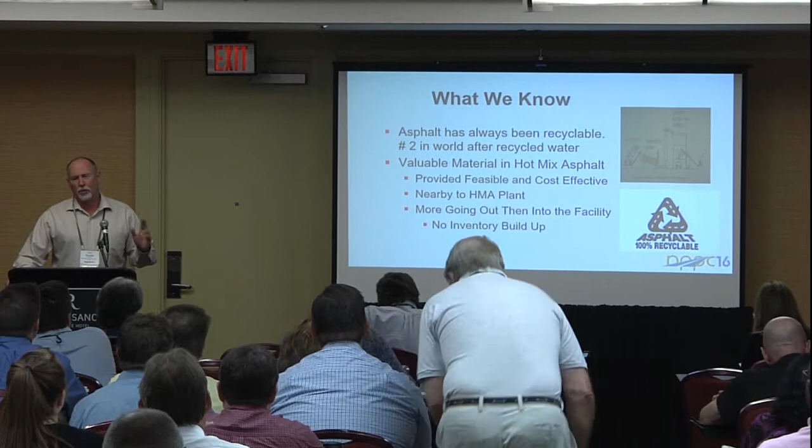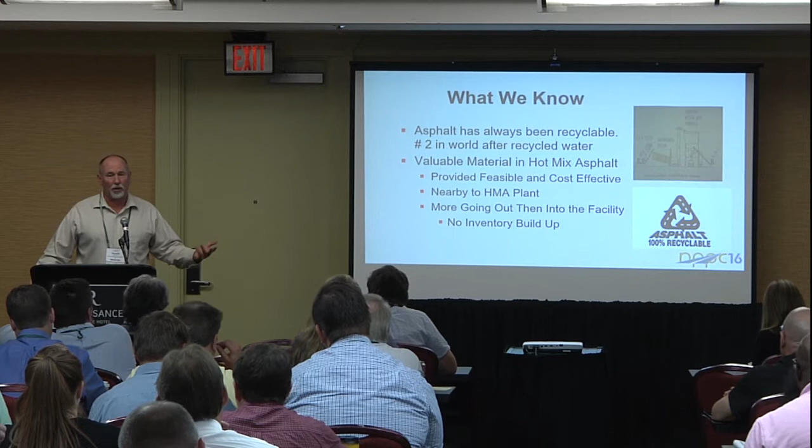So what do we know? Well, asphalt has always been recycled. In fact, it's the #2 recycled material, just right behind recycled water in the world. Everybody should know it's a very valuable commodity to use right back into hot mix. The only issue is that's generally based upon how close it is to the hot plant, and whether they're selling more than they're bringing in, so they don't have large stockpiles and inventory buildup.

We also use RAP in a lot of ways. We use it as shoulder backing, milling it off, putting it on the sides of the road, selling it over to trucking and equipment yards, haul roads, dust control on a dirt road. We're starting to use it now as a base layer. Caltrans in California gives it actually a higher value than aggregate base because of the binding characteristics. All these are great uses, but the problem is they're actually a low value for the value of the asphalt and the aggregates in there.

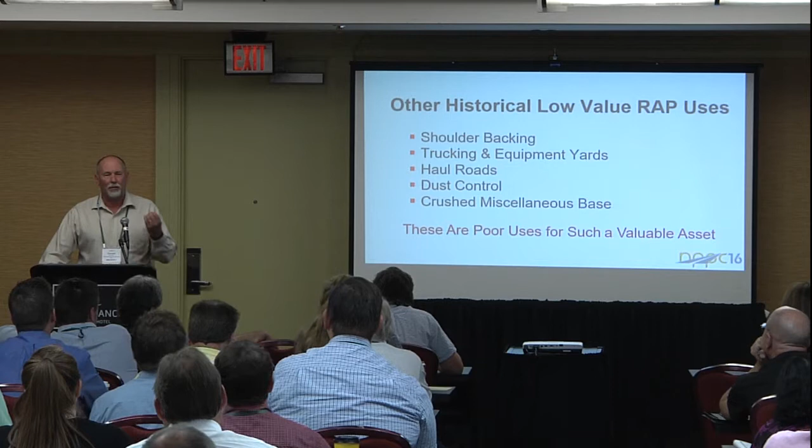So there's no need to squander virgin aggregate. How many people are having permitting issues getting new aggregate facilities in their states? We have a few of them. In California, it's almost impossible now. You just can't do it.

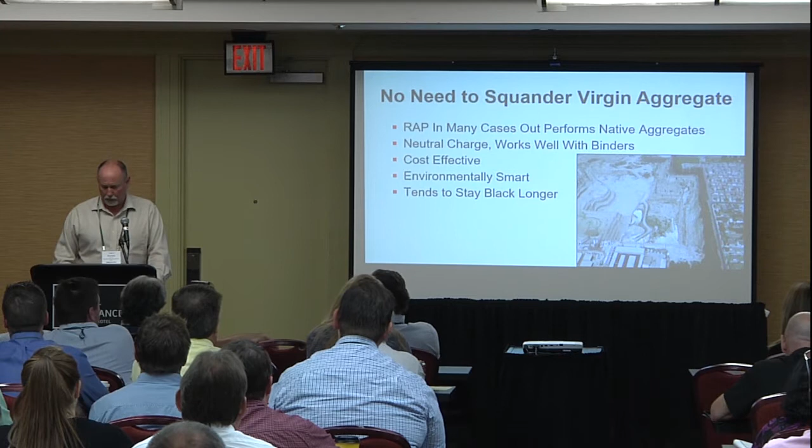So years ago, we started looking at using RAP as other aggregate uses, and we find out that it works well. It's normally a high quality material. It's got a neutral charge, so it works well with a lot of binders. It doesn't have the sensitivity in some of the pavement preservation applications. It's very cost effective, and then it's environmentally smart. You start looking at the carbon footprint and you start realizing there's a big advantage to it. And a side benefit we never tout: in a lot of applications, it just stays black a little bit longer. I'm not going to say it's a black rock, because it's not, but it stays black a little bit longer.

So today what I'd like to talk about is 4 uses that we use kind of routinely in California, and it's starting to spread out. In fact, FHWA put out a request for an evaluation on RAP chip seal and RAP slurries just recently. It was just recently announced who was going to evaluate all that.

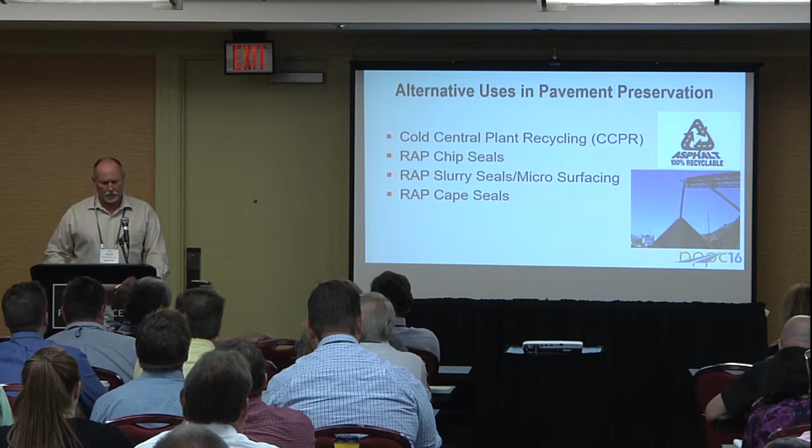So we're going to look at cold central plant recycling. We're going to look at RAP chip seals, RAP slurry seals, microsurfacing, and then a combination of RAP cape seals.

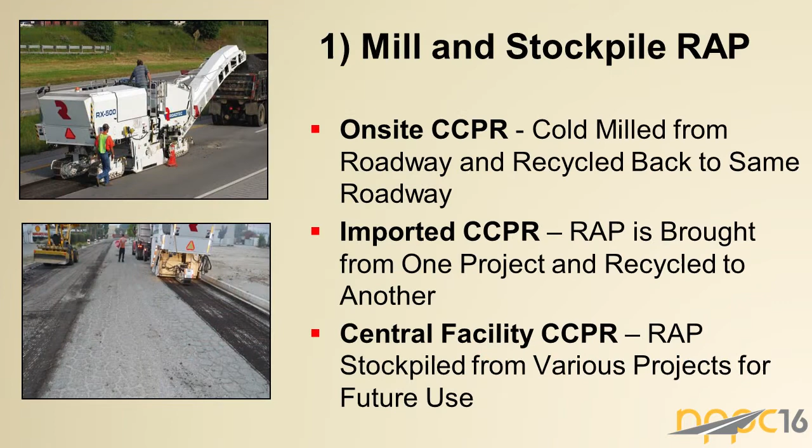So in cold central plant recycling, essentially we take the RAP and we make it into a new pavement. And you can do it one of 3 ways: on site, imported, or central facility. I'm going to go through those.

So on site, an agency may have a project where they have a distressed roadway. We'll cold mill it. You can see that we're exposing some of the subgrade. The nice part of this application is you go and fix any subgrade issues on it. And then we'll stockpile really close nearby, process it, and bring it back to the roadway.

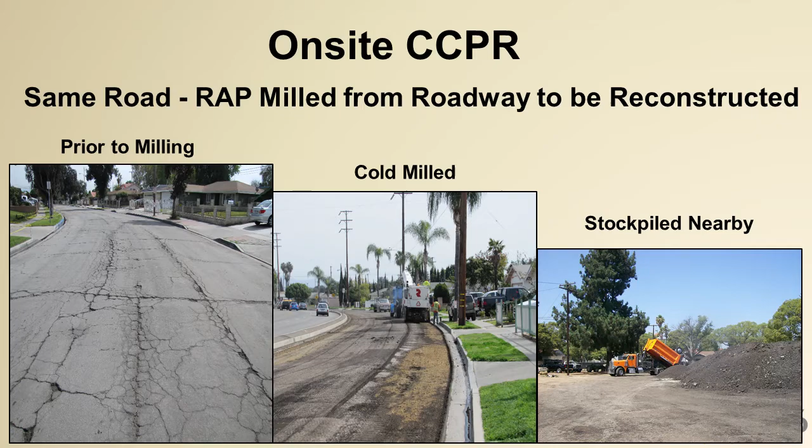In imported, you may have one site that needs the pavement, but the other site needs to get rid of the RAP. So we'll end up taking the RAP from one highway or one roadway and then going to another site and use it on site at their facility.

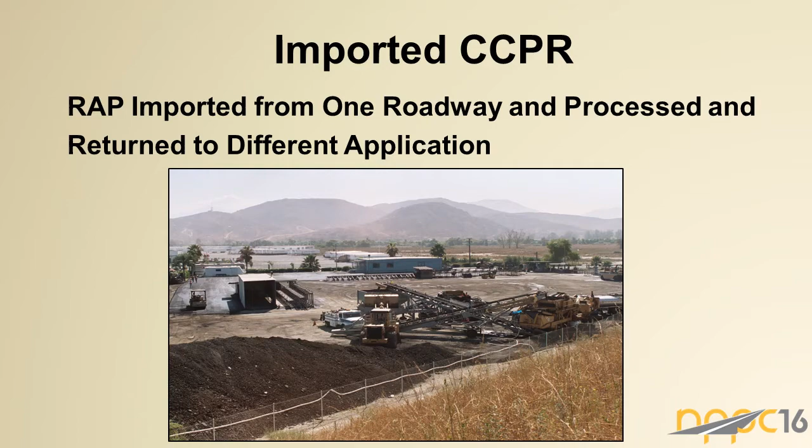The third is what we've started developing: we've developed central plant facilities. So we take in RAP from all our milling projects throughout the state, and we start using it for other applications as aggregates and in cold central plant recycling.

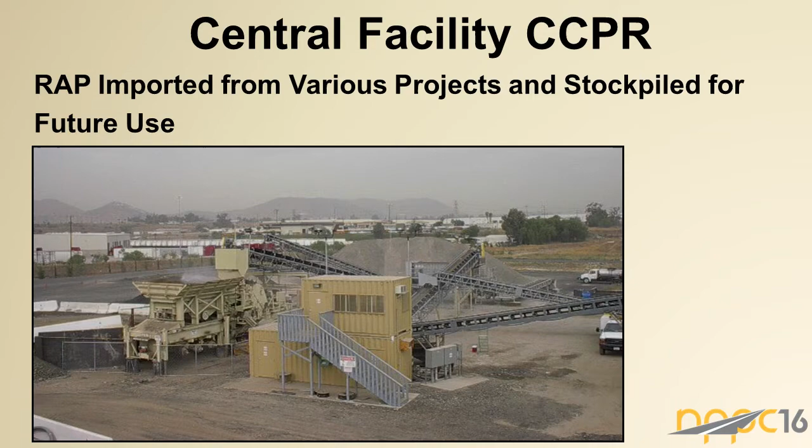So essentially, to go through the process, typically the RAP needs to be sized. We typically like to go a smaller size, more specific surface area. So we go down to 1 inch minus. I know in other areas, like Virginia, they may go up as much as 1¼ to 1½ inch.

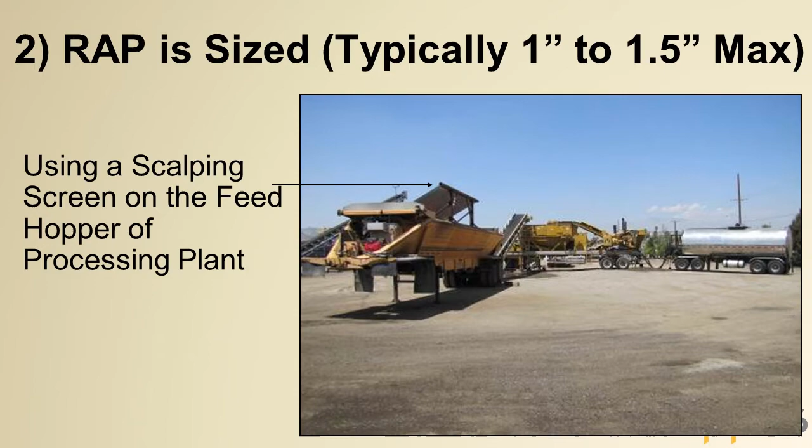You can do this on site just by putting a screen. Run off the millings, scalp off the big stuff, just use the littler stuff. Sometimes you try to break it up a little bit more, or not.

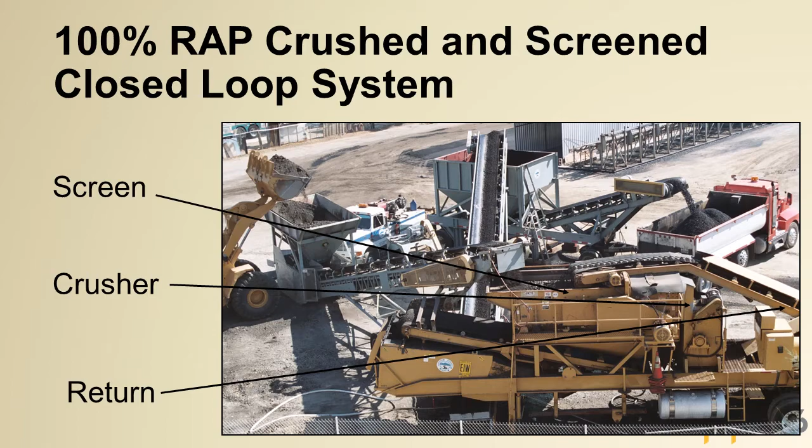Another way is using a closed-loop crushing and screening system. So you can just crush the material, put it over whatever the 1-inch screen, have everything crushed down to its 1 inch minus.

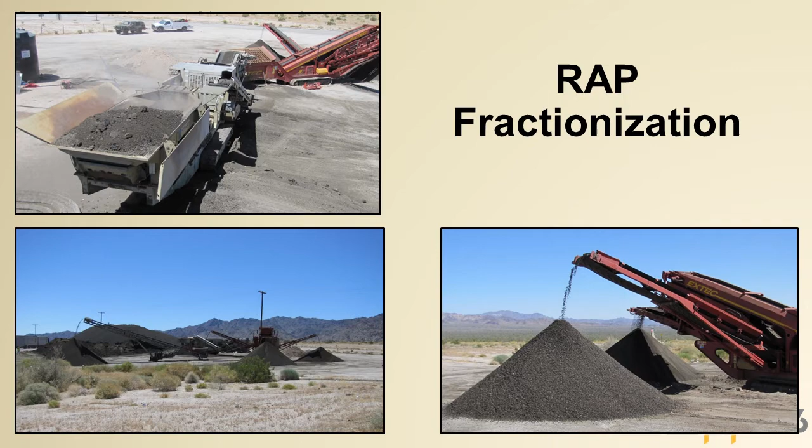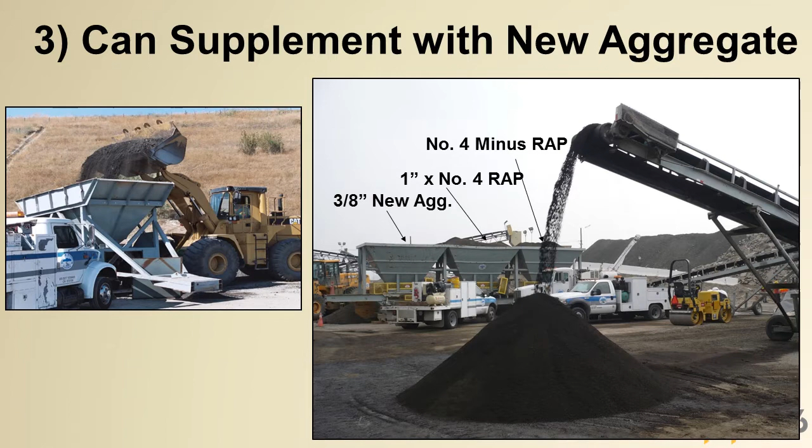Another area is to go further and screen it, segregate it, RAP fractionation, so you're able to combine it to an even more specific gradation. The nice thing is when you do RAP fractionation, like we do at our cold central plant, we can add new aggregate if we want to, so we can change the structure a little bit.

In this particular case, we got a 1 inch by number 4 aggregate, and then a number 4 minus RAP, and then we add 3/8 inch virgin material if we want for a specific performance measure. After you got the RAP size, you're going to mix it. People always ask me, do we use emulsion? Do we use foam? We use both. There's a lot of testing coming out that shows there's advantages and disadvantages to both.

In the long run, they both make an excellent product. We use engineered emulsions, polymer modified. Sometimes, depending on the agency, we may use a CMS2S, or we use an expanded foam. We almost always use some little additive. We like to use a bit of cement, not for structural characteristics, but for curing characteristics, the timing to change the breaking characteristics, giving us more short-term behavior.

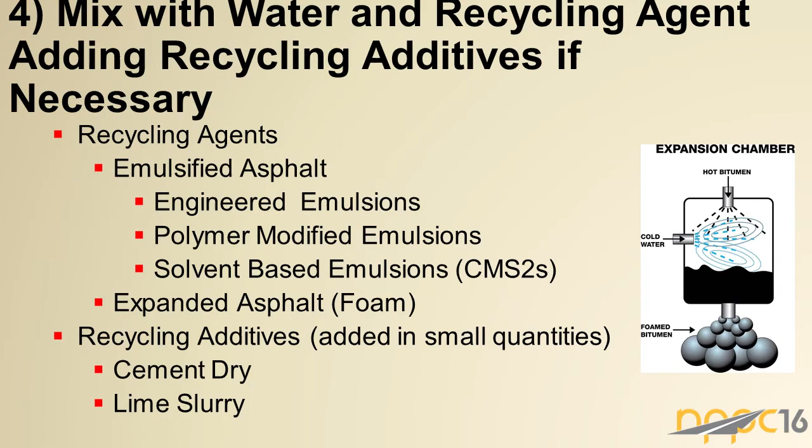In the end, though, we want a flexible material. We want that asphalt to do the workload. Sometimes, in some agencies, they require a lime slurry.

We can do it on site with a combination plant where it has crushing, screening, and a pug mill all in one application. You just set up some belts, some feed hoppers, and process it that way.

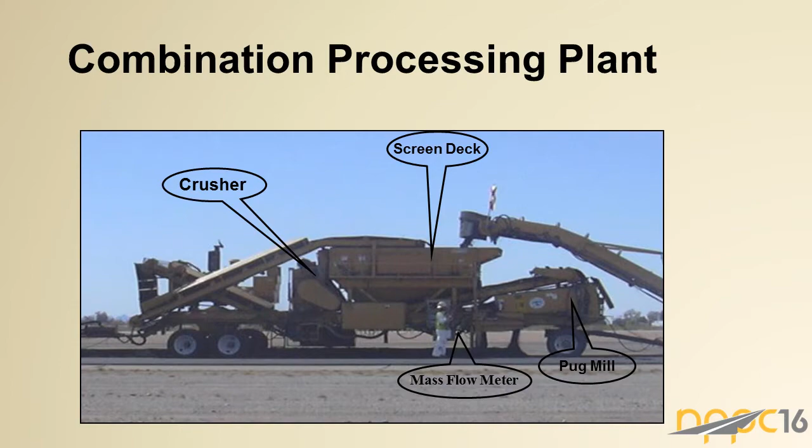Sometimes, though, we have both plants. You can just use the standard pug mill. We went into a large airport recently, and it wasn't really advantageous to make it while we were doing it, so we stripped it all off. They refixed the grade, then we crushed it down, and we just used a pug mill while making it right there for the application.

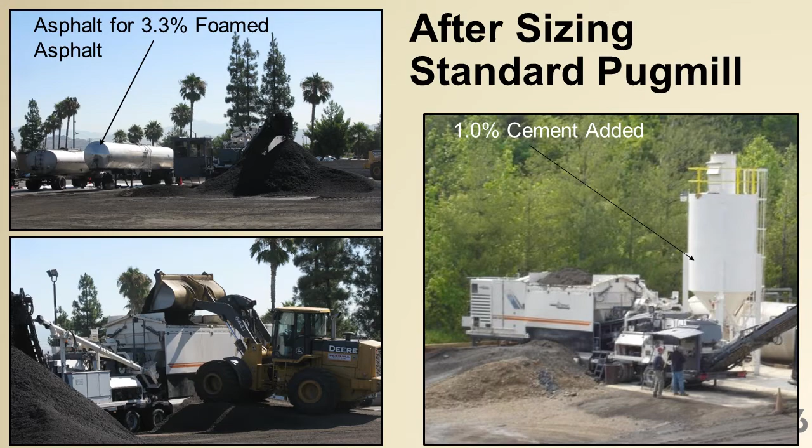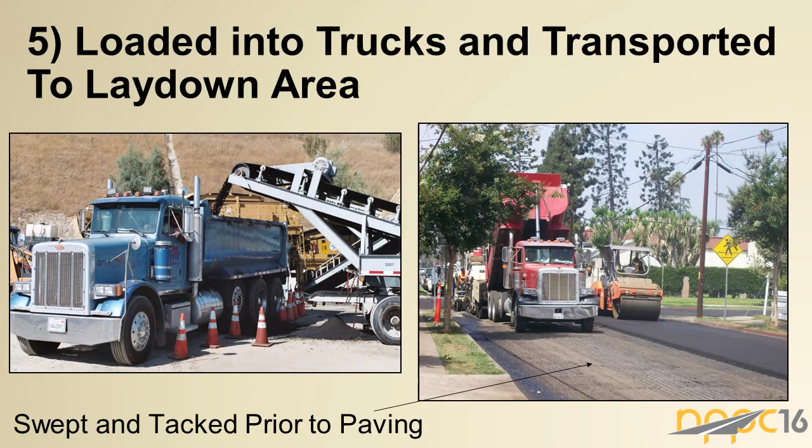We then pave it. As you can see on the right, this was actually a very heavy urban application. We do this process with virtually no limitation in traffic. A standard California road just down is 30 to 40,000 vehicles per day - we do it all the time. Heavy highways, 60,000 vehicles per day.

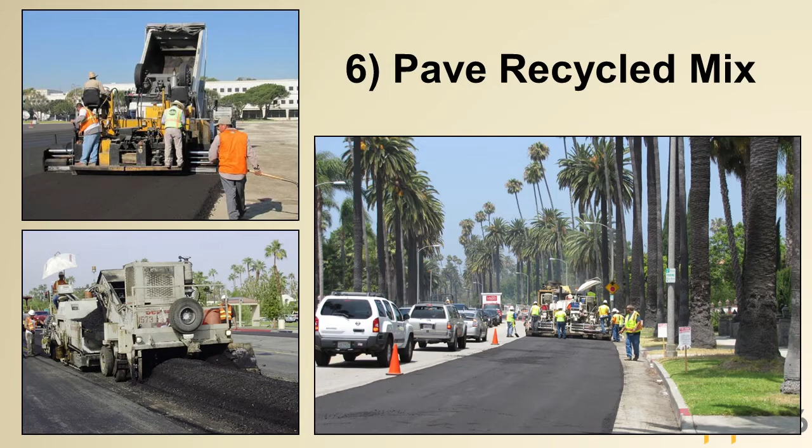The key, though, is because of the higher air voids, you have to have really heavy rollers to compact it. So we use a 25-ton pneumatic, really heavy 10-ton steel, and we actually compact it to a breakover density.

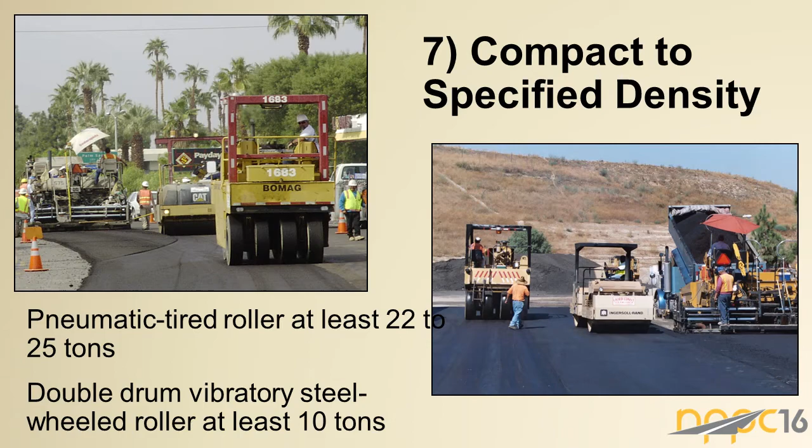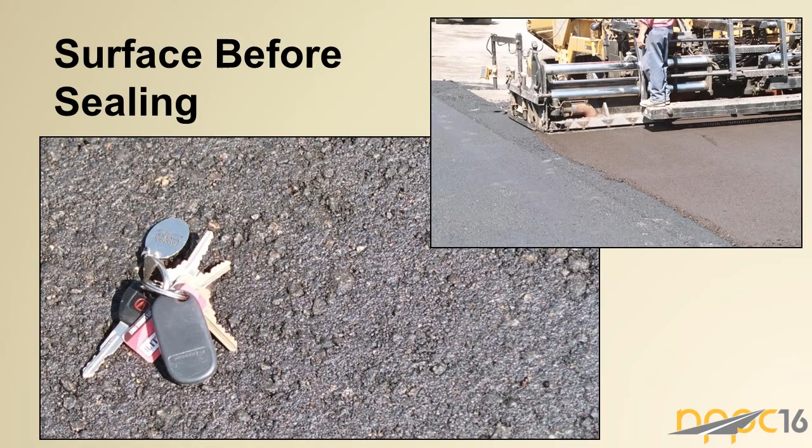We don't lay anything down without protecting it before we release it to traffic. We put down a fog seal - it gives it a bit of a tighter surface - and then we sand it just to make sure nobody's tracking that fog seal into their car dealership or wherever. And then we release it to traffic.

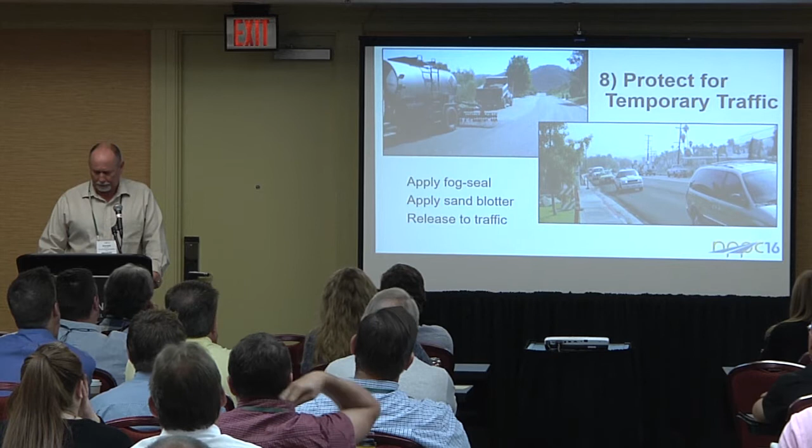We let traffic go on it. It can be several days, it can be several months if the asphalt plant lost their permit or something like that. At some point, though, with emulsion, we re-roll it. We can get about a 4% increase in density by letting the water dry out, re-rolling it, and doing a new breakover curve.

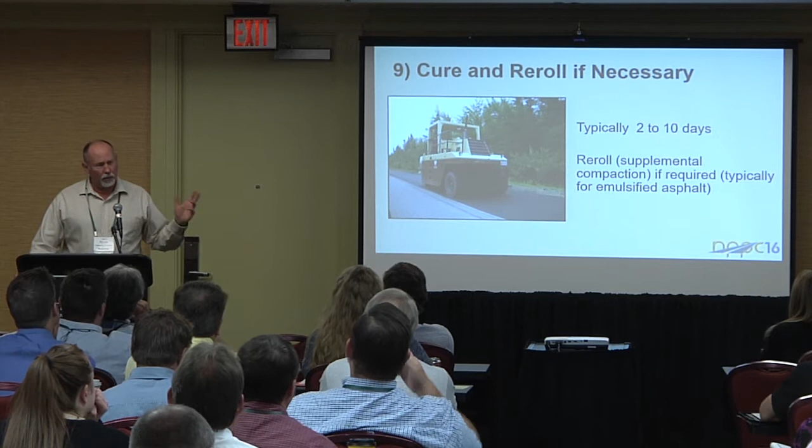Typically we don't do that with foam because it doesn't need it, but I still will re-roll it, just not to a specific breakover. Cold recycle, though, has higher air voids. There's a lot of testing being done showing that as it fully cures, it starts approaching the behavior of hot mix.

But that takes years, 1 to 6 years, depending on who you're talking to. The one thing we do know is it doesn't have the same shear strength that hot mix has, so it can't be left open to traffic. We always have to put something on it.

In lower volume traffic areas, we just put a slurry seal, microsurfacing, maybe a chip seal. As volume goes up a little higher, we'll put a thin overlay. Most agencies like to place as thin an overlay as they can, it's not about giving the structure, they just want it for the shear resistance.

Just a real quick case example, we did a job for the city of Menifee. The thing I like about this is Andrea talked about LA County. LA County does this a lot, this particular application.

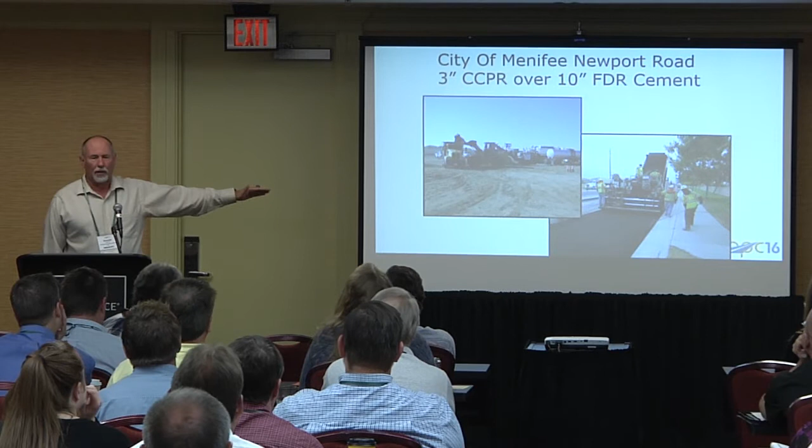We'll go in, strip off the AC, and then cement treat the subgrade. They go in and fix the subgrade, then use this cold recycled material maybe as the first 3 inches of the AC, and then come back with as thin an overlay as they can on top of it.

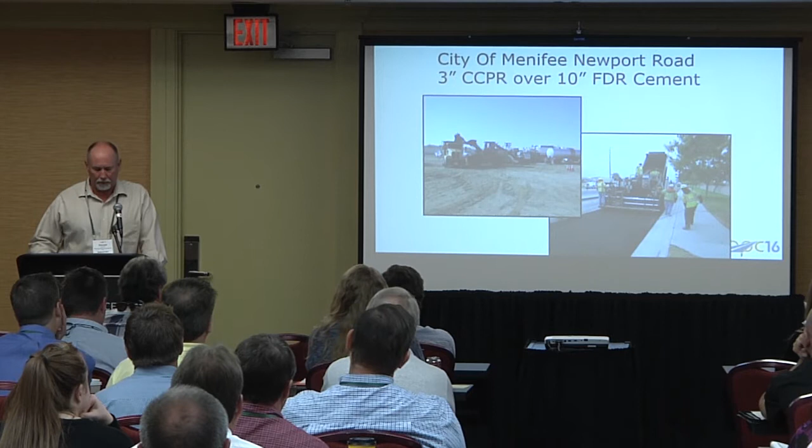Another application, we just did an existing auto auction, actually closer to about 5 million square feet. This was just the first phase, but again we stripped off the AC in one phase, paved it back, and kept moving over. I'd like to switch gears now and start talking about RAP being used as aggregates.

We used it in chip, and back in about 2005 our company really focused on the microsurfacing and slurry application of using RAP. I was a little worried about using RAP chip because I was afraid it would start kneading the surface together, meaning it heats up and the traffic gets on it.

Well, what I'm finding now is that's the benefit every agency likes the best. So they actually go hand in hand.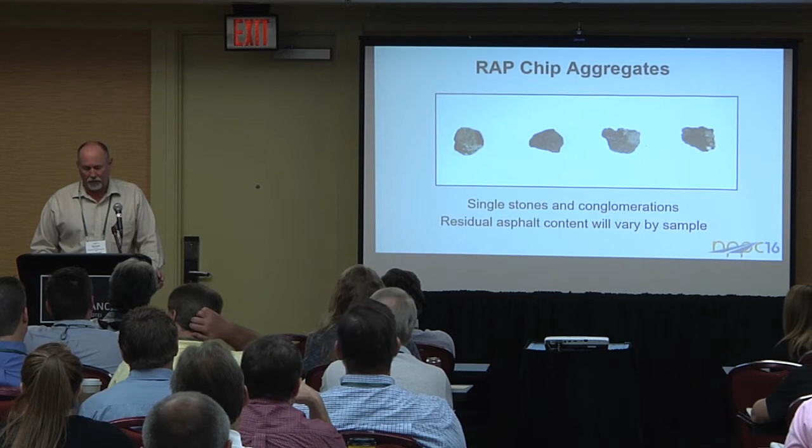What everybody wants with the chip seal is the benefit it provides the surface, and the RAP actually ends up providing a better surface. This is our standard gradation, we make two: a medium and a 3/8, we call it. That's the gradation of the RAP aggregate, not extracted aggregate.

The other thing is we want to make sure we always have a 3.5% minimum residual asphalt content on it, meaning we're not getting too much dirty material in there, or too much virgin material in there.

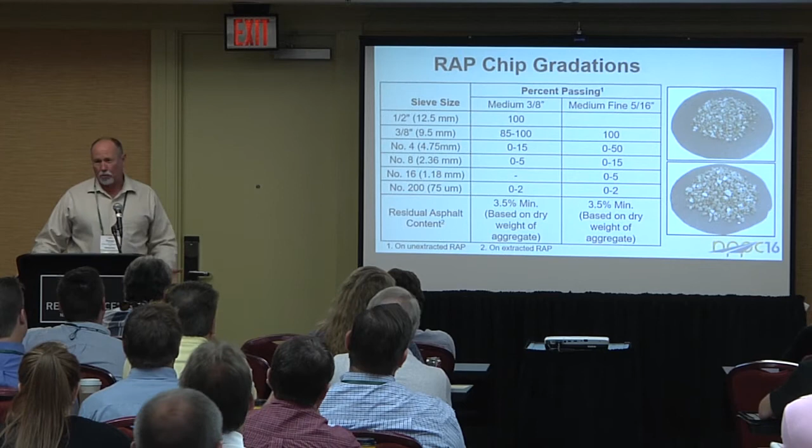Andrea talked specifically about the medium fines, that's used quite a lot in urban areas. The 3/8 is more in rural areas. One of the first things agencies need to get a handle on is we don't want to wash this product. With typical chip crushing you get smears and fines that don't bind very well, but when we crush this, we want the material to bind, and essentially the fines are asphalt.

In fact, for 3 years LA County has gone 100% to this, and a lot of agencies near us have gone 100% too. I couldn't get the county of San Bernardino, the largest county in the country, to use this because they had a cleanliness value. We could meet all the specifications, durability, everything, but we couldn't meet the cleanliness because we don't wash the chip. They wouldn't do it.

Ironically, they were the test project we first did years ago, but those people moved on, nobody remembered it. How many agencies have that issue?

Then this year, they couldn't get supply, so they were forced to say okay, we're going to take your material. They did one project, and since then they've gone 100% to it. In fact, we did almost 20,000 tons of chip for them so far just this year, just this year after they started trying it.

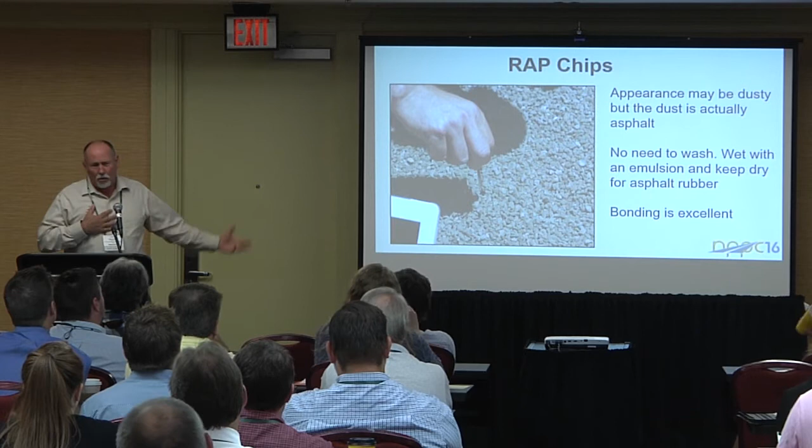I can say this without hesitation because this is not a unique process to us, we just started it, and California did it more. But any agency who switches over, when they switch or try it, doesn't go back. They just like the RAP chips so much better.

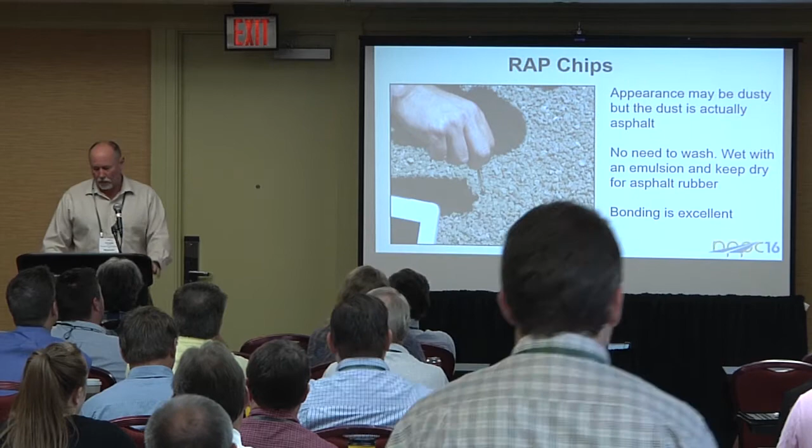LA County gave us a big challenge because they want to use it with rubber. So when we do emulsions, it's pretty nice, we can actually throw some water on it to keep the dust down. The wetter the better in emulsion applications. But on rubber applications, what happens when you have water hit hot asphalt?

It starts foaming, think about fried chicken going in the frying pan when it's still a little wet from thawing out. So we had to do a process where we dried the chip out a little bit and use this. So now they started using this instead of pre-coated asphalt chips. What they do is go to a hot plant and say, hey, we need about 1% asphalt or 0.5% asphalt on these chips so it would stick.

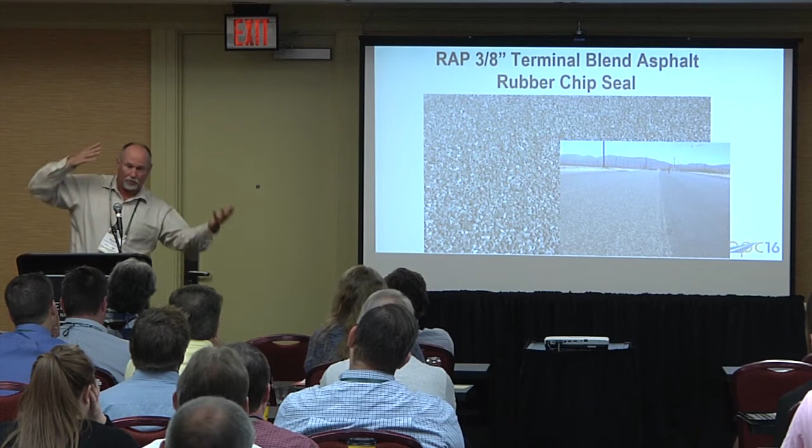As I told you, I did it back in 2006. Started the RAP slurry back in about 2005 - I'm going to talk to you about that now. But then we tried what we had left, and did this project in 2006 with a 5/16 chip with San Bernardino County. They had it installed.

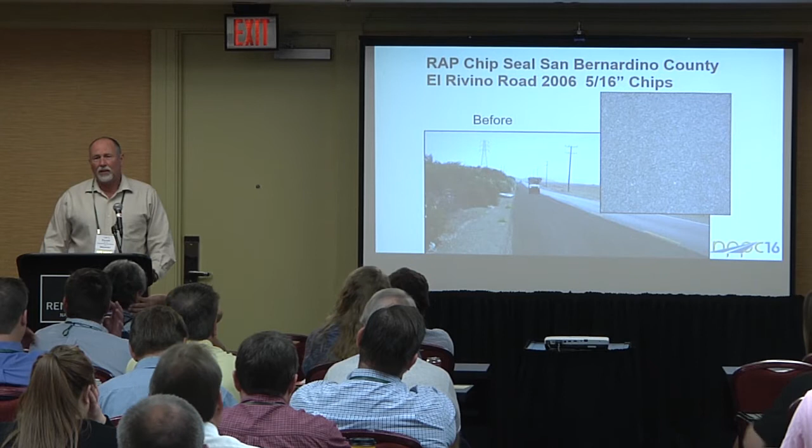It's right by our facility, I love going out there. Just recently I went out there, and it still looks really good - really, really good. It gives you a darker coloring. The traffic actually makes it look better.

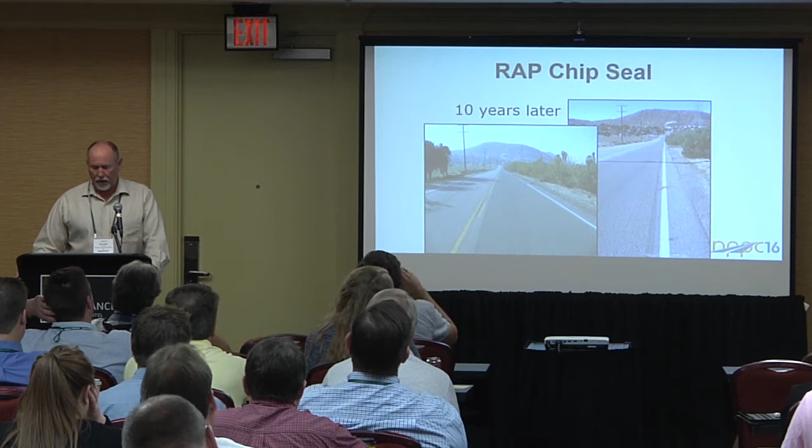So then LA County started wanting to use, let's do it on scrub seals. You can see what one of their first projects was back in 2009, off to the right picture. Now, is that a pavement preservation type roadway? No, okay. But...

How many agencies are here that have more than enough money to do everything they want? Well, really? I almost got a hand. I was going, oh, wait a minute. Everybody wants to take a picture with you.

Okay, so somebody asked, okay, why'd they go to the chip seal, scrub seal on Double Grove? Money. Hot mix asphalt, even a thin mill and fill, just costs so much more. So people are using - I don't want to use the term Band-Aids - but they're using alternative processes to try to get their money to go farther. So scrub seals are actually showing a lot of promise right now.

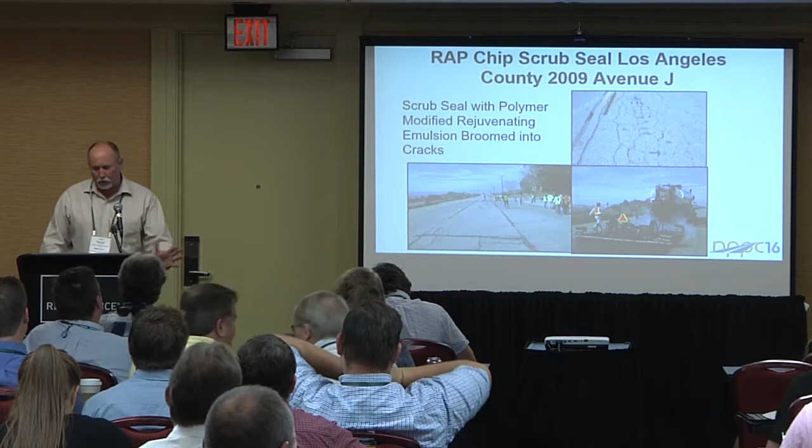It's where you take a chip seal, but you scrub the emulsion into it, crack sealing. NCAT has been doing some testing, if you're familiar with that, shows the benefit. This is actually - I wanted to get out there, didn't have time - but 6 years later, you can see that same area where the cracks are filled. Now, I'm not going to say you can't see them, but the water's not getting into them.

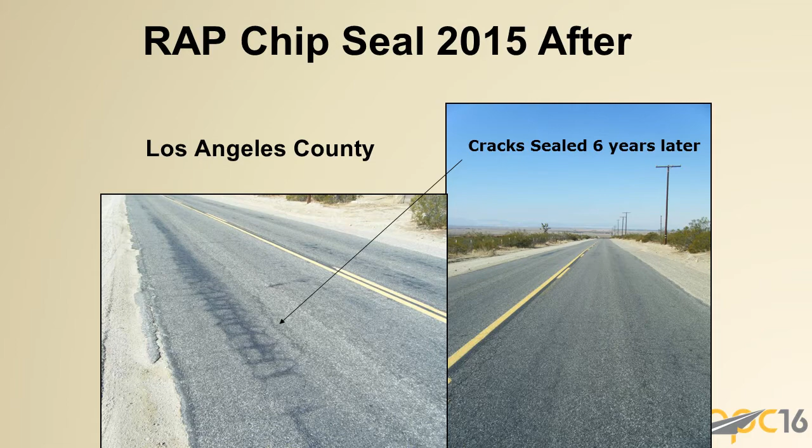It's holding up really well, and there's some areas of the project that look really, really good. So it's just an application that LA County has found is cost effective and giving them a lot more life.

We started with microsurfacing RAP and microsurfacing slurry with RAP. Way back in 2004, I started experimenting, and I got a company to say, hey, let's come out and try it. So they worked with us, and they liked it, but they weren't incentivized - they just didn't want to, since the agency's paying them for regular aggregate, there's really no sense of it. So we ended up buying the company.

And we put on their metrics - you got to start going more with RAP slurry. Well, they started getting agencies involved, and what they found is it took a little change. We had to do things a little bit differently - had to open up some things in our hoppers, and we have to roll it. But what they found is when they started doing it with the agencies, every agency only wanted that, and they were the only ones who had it. Guess what? Better economics for them. So it just started growing big. As I say, any agency who does it doesn't go back.

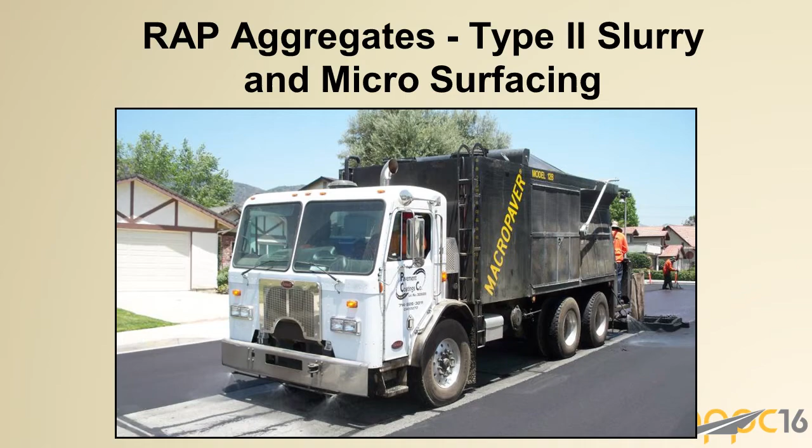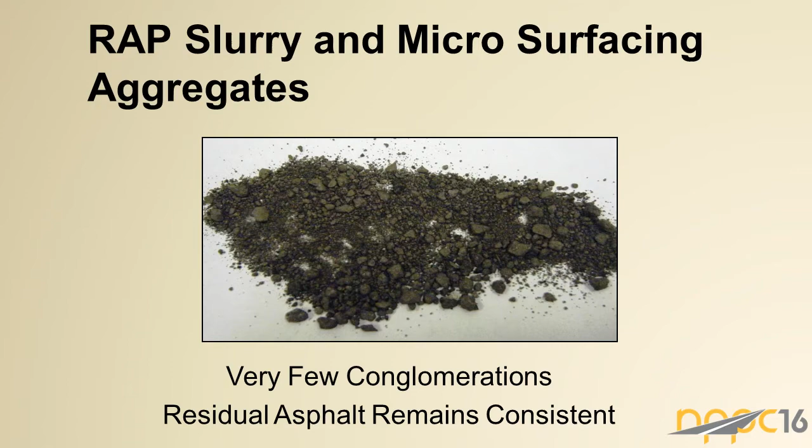So when we look at the RAP slurry and microsurfacing aggregates, there's not as many conglomerates, but it's finer, because it's a finer mix. But there are some.

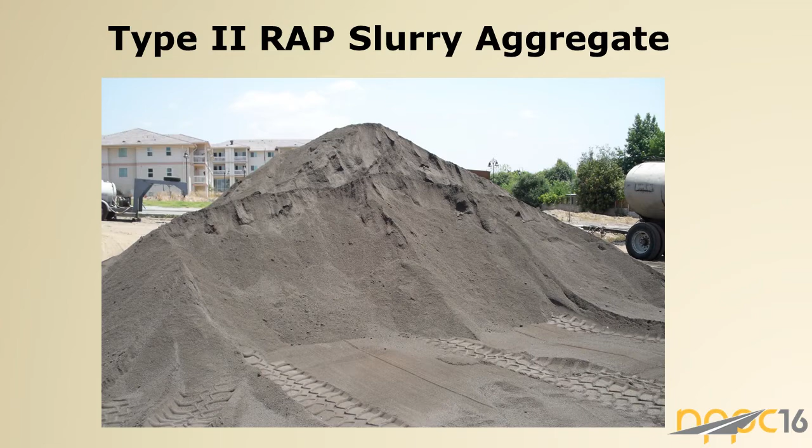You can see by far the biggest issue is stockpiling and handling. When you let this sit in a lot of heat, it starts clumping up. So we found techniques for dealing with that: we make it fresher, and we have some screens on the equipment.

The other difference between this and conventional aggregates is there's not as many fines, so we built our own gradation. Because you don't want to crush down all those fines and create more specific surface area, we don't need as many fines. In a regular slurry or microsurfacing, you need those fines for binding and to absorb a lot of the emulsion you're adding.

With RAP, we don't need that. We did find out about the clumping, so we have a standardized process we put in place. And what's interesting now is we have a company that makes the material, and a separate company that applies it.

Our company that makes it now sells it to our competitors, the companies who apply it, because the city agencies are specifying it's not proprietary. So we actually go out and train our competitors on the few minor things they need to do. Once they've started, our competitors have convinced agencies to switch over to it. They find it provides a better product in the long term.

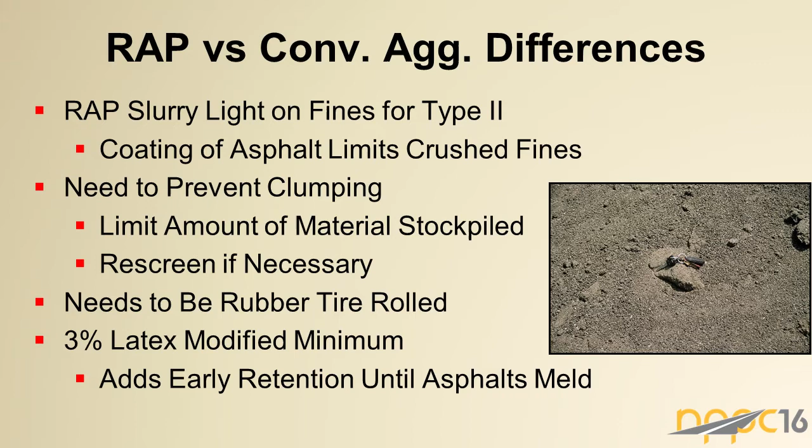You do have to roll it. We use a rubber tire roller to roll everything, and we use a 3% modified emulsion on everything. We find it adds a little bit better retention until everything starts softening up and comes together.

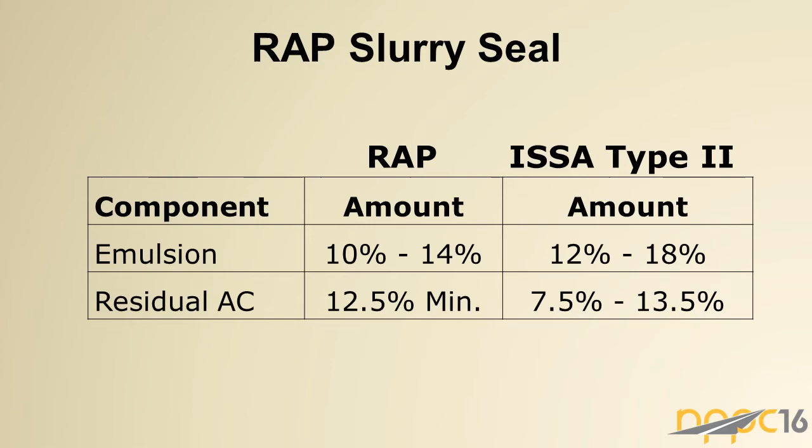To that end, we're allowed to use less emulsion, so it's actually just as cost effective, if not a little cheaper than conventional slurries, because that asphalt's already there, we use less. You can use conventional equipment.

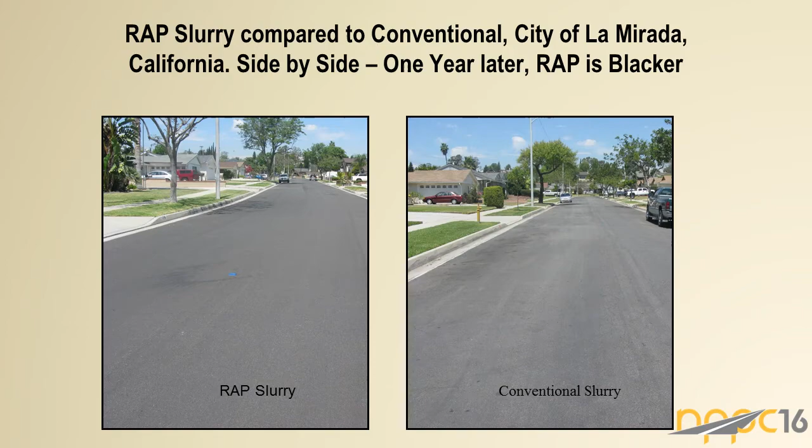I actually have the video on the Doublegrove, it's about 3 minutes. Do we have time to play it? It kind of ties everything we've been talking about together, if I can figure out how to play this. There we go.

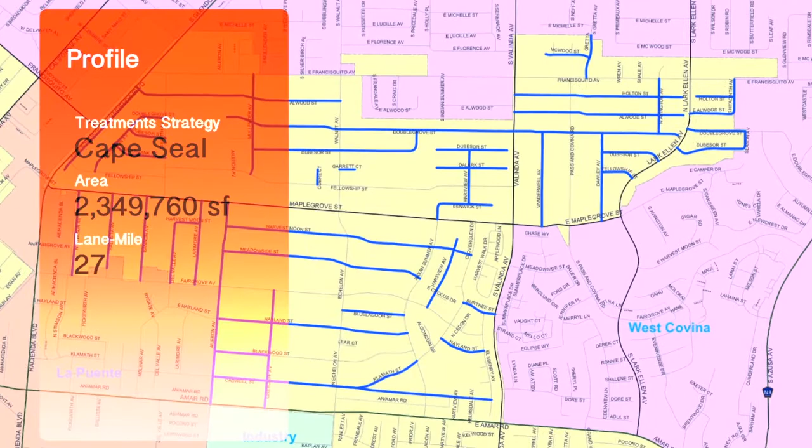The reason we're showing this is LA County was doing it for years, and they finally said they've got to start touting their own successes. So you can see all the streets that were done. It was only about 27 lane miles, but they had a lot of areas in really bad condition.

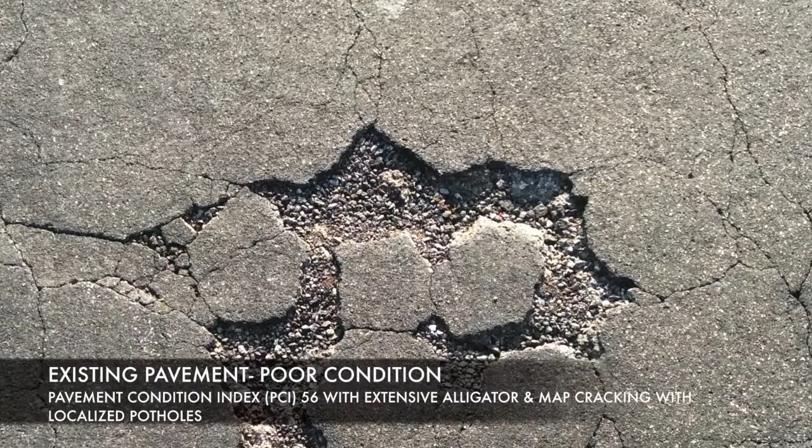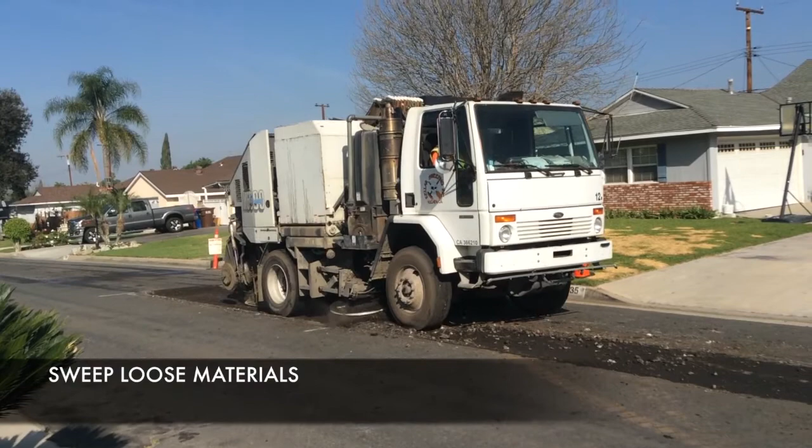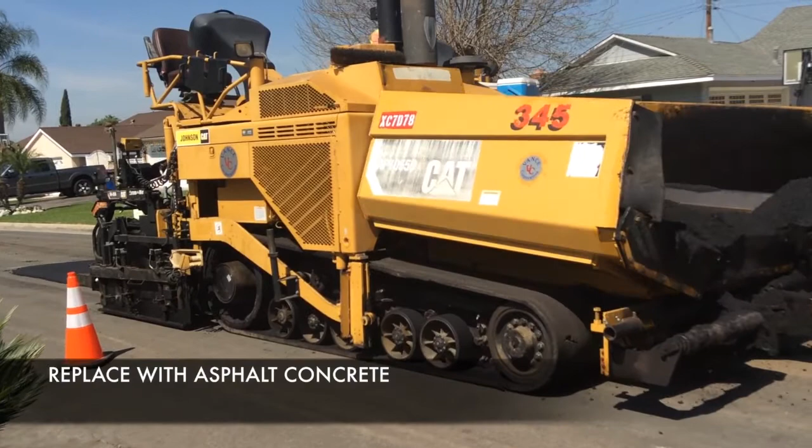So they did some limited dig-outs first, and some limited patching just in the really bad subgrade areas.

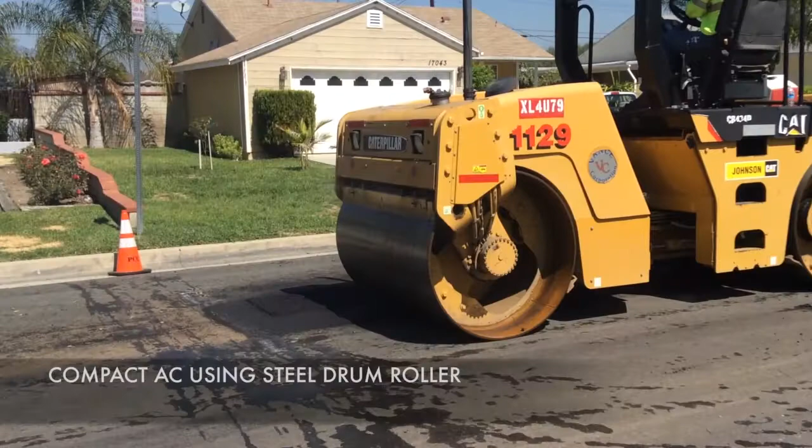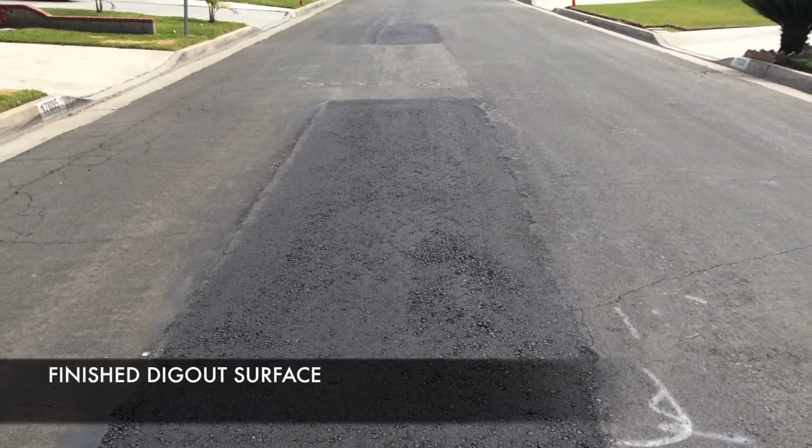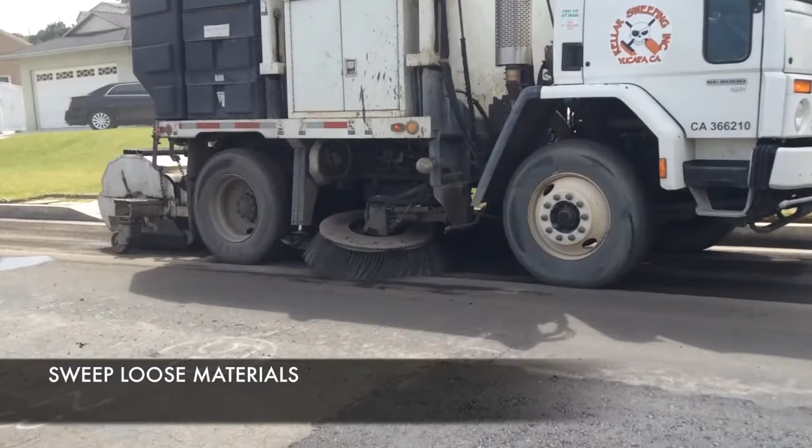So this is what we talked about most of the morning: we micromill. LA County's got to the point they won't do any pavement preservation without micromilling. They think they get better bonds. They clean off the gutters, so all those buildups of material are gone now, and I love when they go in because they promote it more than anybody.

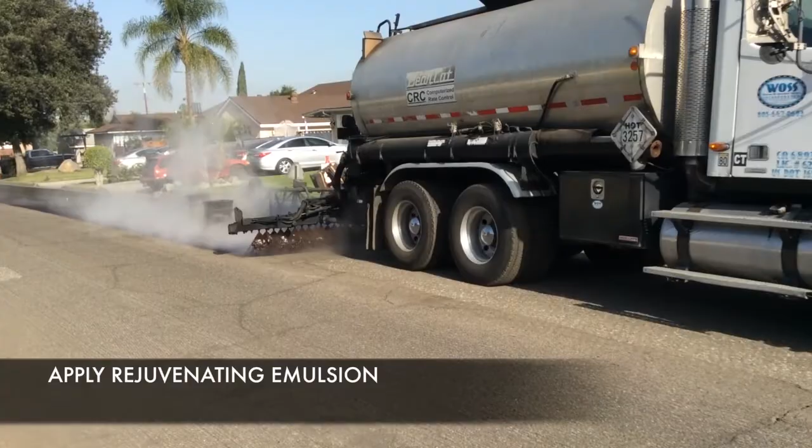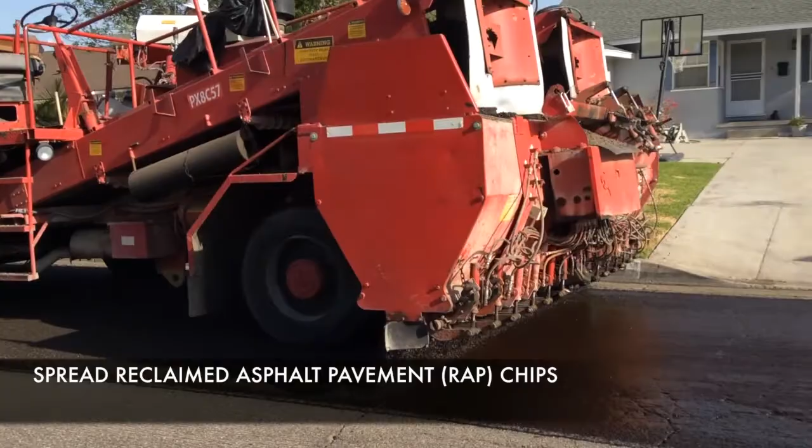So you can see the scrub application where we're applying the emulsion, and then we have a set of brooms that sweep the emulsion in behind it. Then it's just a standard chip machine that applies the chip, and you can see the RAP chips placed down there.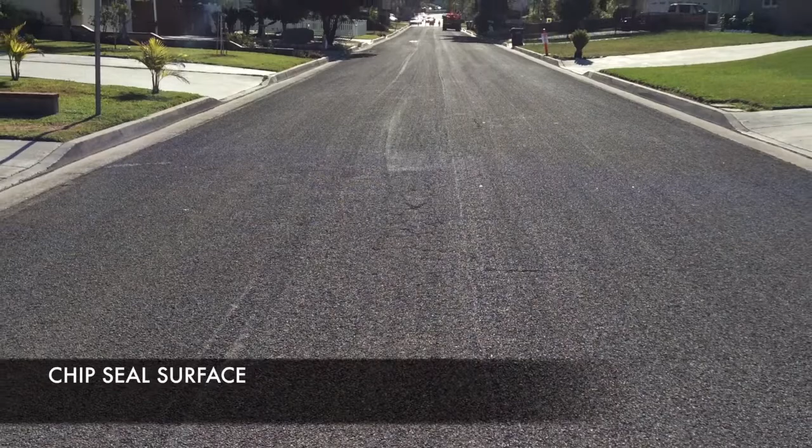You roll it and sweep it like you would any other chip seal application, and you can see it starts filling in some of the cracking. Then we just put a RAP slurry over it. We tend to use those slurries a bit more than microsurfacing out in California because we have the weather to do it.

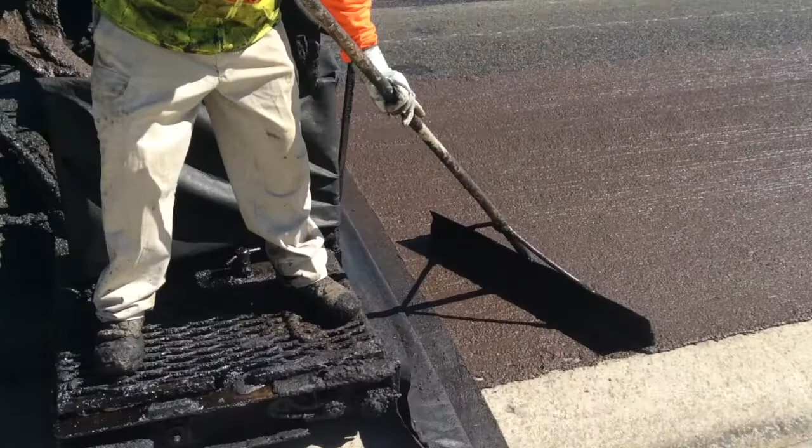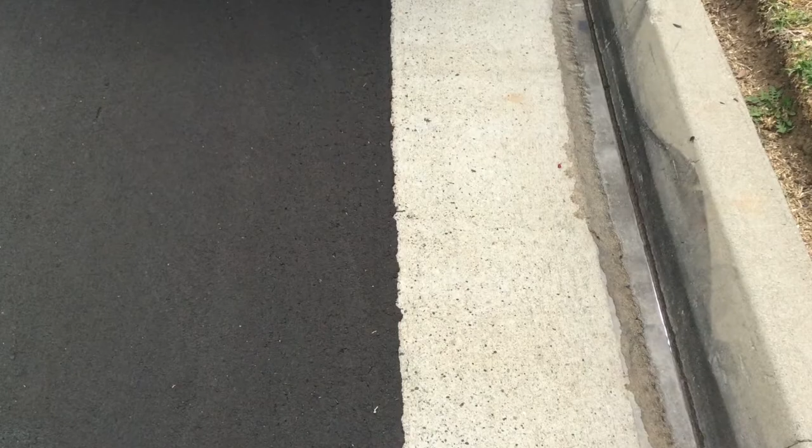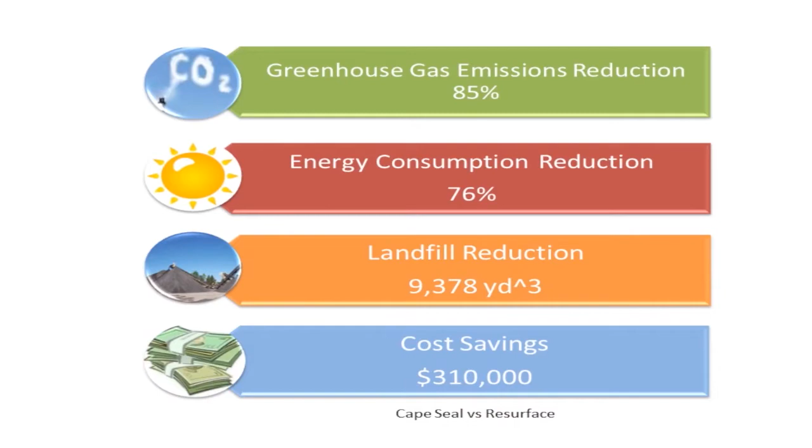One of the things the county does, and I suggest to any agencies using any type of environmental process, is start calculating your energy savings and use that as a promotional tool. It makes a huge difference.

We did a job for the city of Moreno Valley for cold in-place recycling. We just wrote a little piece on how they saved so many tons of emulsion, so many fewer barrels of oil used, how much energy saved, and they put a little blurb in the newspaper. They had more phone calls on that job about what a good job the agency was doing than any other job, where they usually only get calls about what they're doing wrong.

So I've just got a few more slides here. One of the things happening is we're starting to get agencies who want to learn how to do this, and there's a couple of ways to do this. One is you can just specify it in conventional bids, you just say it shall be a RAP chip or RAP slurry or cold central plant.

But the other agencies are starting to stockpile their own materials, and they're doing RAP management, meaning they're looking for their own sites. Like LA County has 3 sites where they're specifying on their jobs, the RAP on regular jobs comes to them, and then they process it out and start using their own materials for their products.

The other option is like we do. We're a commercial industry, we have 3 of these throughout California, we're a milling contractor, we run 80-something mills. So when we take those RAPs and can't find a dump site, we'll send them to our facilities. We've gotten to the point there's such value to it, we're able to offer our other divisions credits because we're starting to sell those.

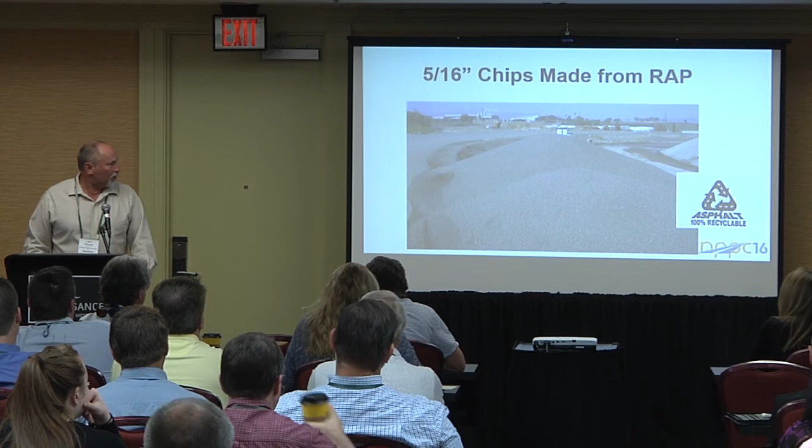So this is one of our facilities, and we just make the materials ahead of time or as needed. Right now we service LA County, San Bernardino County, Riverside County just did their first demonstration on another project, and they already said they're putting out a bid next season. But you can also use this as your own, make your own urban quarry - figure out a site and start bringing in your RAP and do some on-site management.

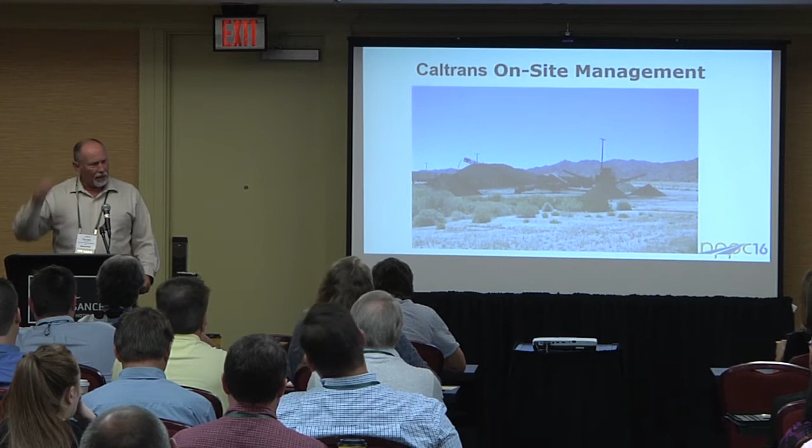So this is a plant we used for Caltrans, where they had a bunch of millings from a job that they put on some right-of-way, and one of the maintenance engineers said, hey, I could use this. So we went in and crushed simultaneously - if you set it up right, the chip and the slurry - and they used a Cape Seal on Highway 10 on the way to Arizona. Actually, that maintenance engineer didn't get any approval from anybody, just essentially did it on their own funding, and later was given recognition for being innovative and using it.

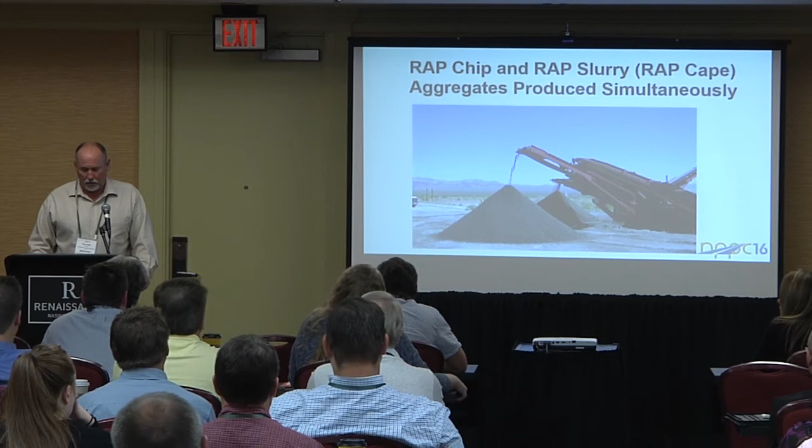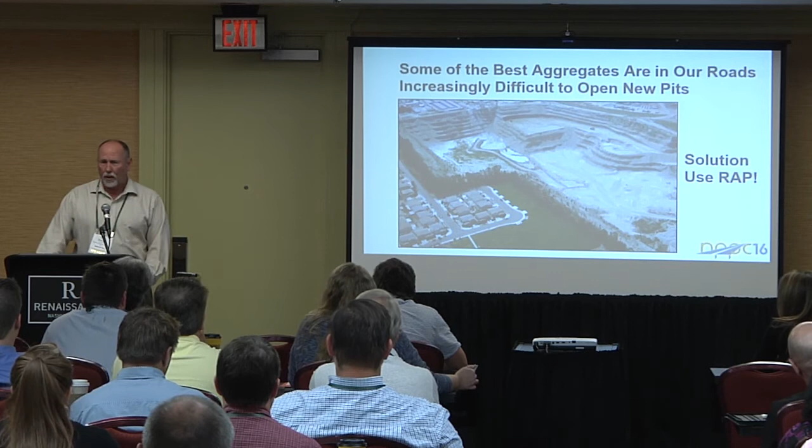So to summarize, this is a reality for us. See the houses next to these aggregate facilities? More and more urban invasion on aggregate pits - you can't find the aggregates. We're shipping in sand from Mexico and rock from Canada as I stand here today. One of the solutions is your own assets - it's in your roadways, use RAP. And I'm not just saying willy-nilly, but if you do good quality control testing and do it right, some of our best aggregates are in our streets right now.

Any questions? I think we'll have time for one question. So if there's someone with a real eager hand up, we'll take you.

Don, rubber RAP versus polymerized RAP versus conventional RAP - are they all created equal for you? We have a problem with rubber RAP and cold central plant recycling because of rebound during compaction, but we're not finding a problem with it in the chip or the slurry because of the aggregate as opposed to compaction.

For re-rolling, what we'd like to do is like the moisture, because when you first compact it, there's a moisture trap in there and a buoyancy effect and it's cooling. So what we like to do, when I say 2 to 10 days, is wait until the moisture gets down to about 2% residual and everything's broken if you're using an emulsion. We re-roll when we get high sun, a 90-degree pavement temperature, which could be as low as 60 degrees ambient temperature with the sun, and we just re-roll it when the moisture's gone down - that's a couple days later. Now traffic starts doing it itself, but we like to do it uniformly across on the re-roll.

And then for cement, we want to maintain a 3-to-1 binder to cement ratio - meaning whatever your residual binder is to cement, you maintain at least 3-to-1 so you maintain flexibility. But we do add a little - so if you're adding 3% emulsion and it's 2% binder, you'd want to add about 0.6-0.67% cement, so you still maintain flexibility. What happens is the cement adds early strength, it sucks out some of the moisture and provides strength that traffic will actually break down when they get on it, and that's what we want. The traffic is supported by the flexible asphalt.